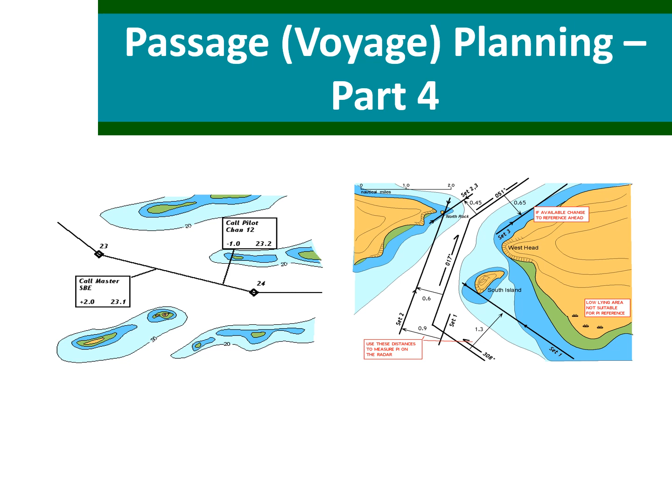Part 4 will focus on the following: we have the concept of the underkeel clearance or UKC, we'll talk about squat, we'll talk about calculation of tidal windows, and also what is the principle of MDR, which is the minimum depth required.

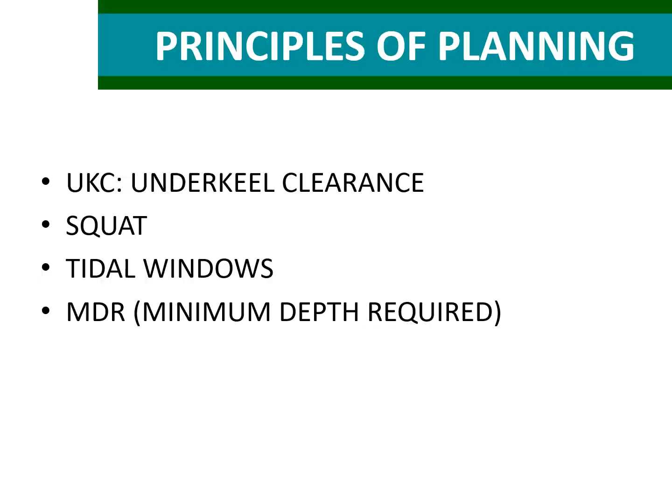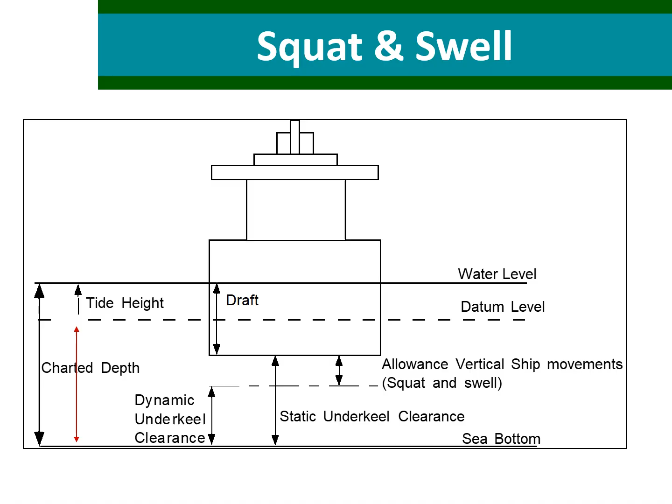So we'll start firstly with the UKC, which stands for the underkeel clearance, as we have known before. As I told you, maneuvering of a vessel is affected when the static UKC is less than 7 times the draft, meaning we are in shallow depth or shallow water. It will become noticeable when it is at 4 times the draft. So when the static UKC is 4 times the draft, it starts to become noticeable, and when it is less than 7 times the draft, that is the indication that the vessel is now in shallow water.

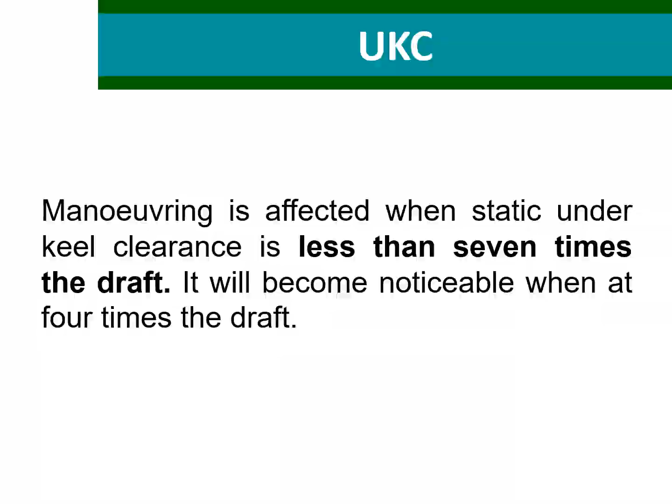And when we say it's in shallow water, the vessel basically starts to experience the principle of squat, because of which the maneuvering of the vessel also starts to get affected, and there's always the danger of the vessel's bottom touching the seabed or the propeller or the rudder getting damaged. So all those things come into play. I'll show you what I mean, and show you some diagrams as well.

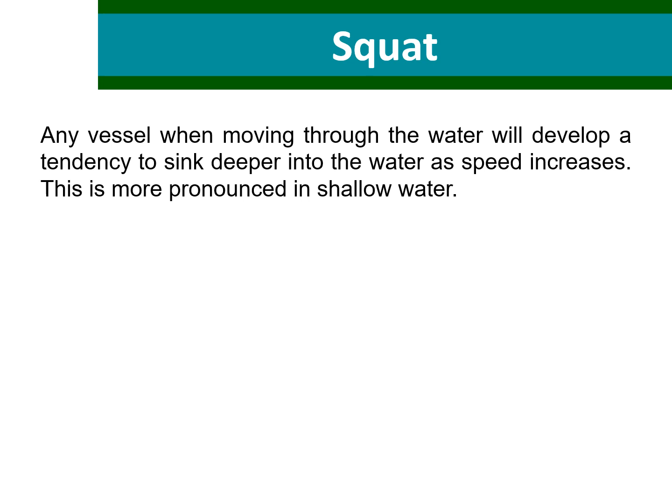Squat is when any vessel, when moving through the water, develops a tendency to sink deeper into the water as speed increases, and this is more pronounced or more noticeable in shallow water. Masters of the ship normally nominate a safe under-keel clearance to be maintained at all times during a voyage.

Now remember, the nomination of the under-keel clearance by the master may vary slightly depending on the situation that your ship is in. Like I mentioned in my previous videos, sometimes in river passages there will be times when you may have to go with as low as 50 centimeters of UKC, which is normally not liked by the masters. But because it's a river passage, sometimes you have sandy bottoms or shallow sandy seabeds made of sand and soft material, where it's even allowed for the ship to touch bottom. So there are different situations, and as a master you will have enough experience to understand in which situation you may allow a much lesser UKC.

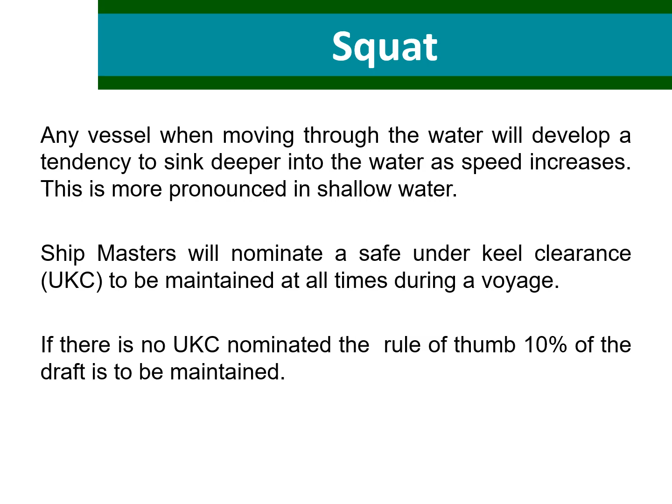But normally the master would like to have a minimum safe UKC, to keep the ship's propeller and the rudder safe and the ship's bottom from touching the seabed as well. If there is no UKC nominated by the master, then the rule of thumb is that at least 10% of the ship's draft should be maintained in depth of water below the keel. So if your draft is 10 meters, then at least 10% of 10 meters is about 1 meter. So 1 meter of UKC, or depth of water, should be available under the keel. That is normally the rule if the master does not nominate a rule himself or herself.

The squat may also be calculated using the formula: squat equals V squared multiplied by block coefficient, CB, divided by the constant number 100. CB, the vessel's block coefficient, can be obtained from the vessel's maneuvering data, maneuvering diagram, or maneuvering booklet, depending on what it's called on your ship. V is of course the vessel's speed through the water in knots, and 100 is a constant.

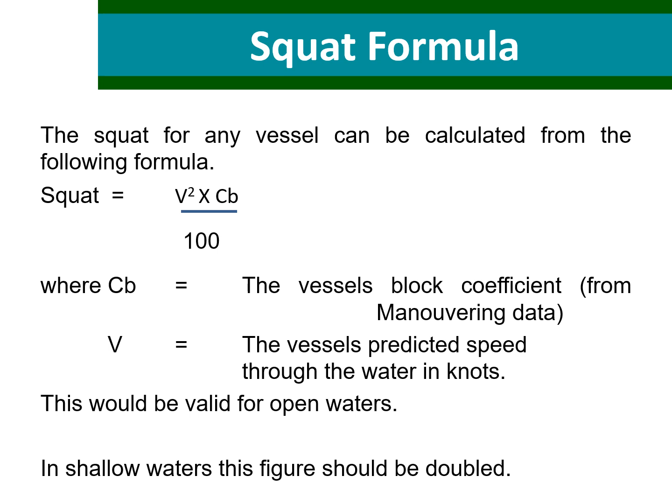This formula is also valid for open waters, and in shallow waters the figure you get is normally doubled, because that gives you a safety margin. In shallow water the danger of squat is more - the danger of the ship running aground or touching the bottom is more profound. So you need to double it, which will give you an adequate safety margin.

The reason for this is that as the vessel moves faster, the water beneath it also starts to move faster. Because of this fast movement of water under the keel, there is something known as the Venturi effect, which is actually a suction effect. As the water moves very fast under the keel, a vacuum is created, and there's a suction effect on the ship's bottom, so the ship sinks towards the seabed. That is squat, if I can explain it simply.

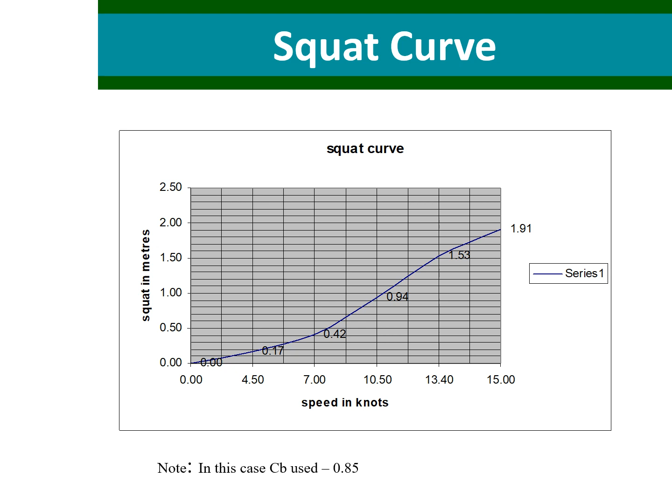That's why as you increase the vessel speed, the vacuum or suction effect on the vessel's bottom also increases, because of which the vessel sinks further towards the seabed.

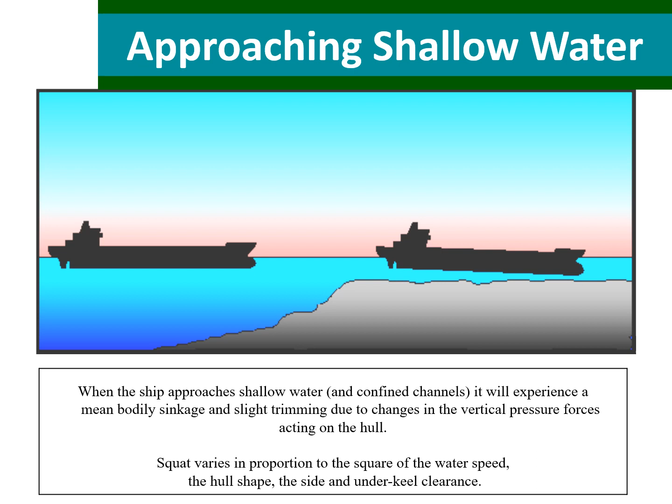The vertical pressure forces acting on the hull is what I was referring to as the Venturi effect, which basically sucks the ship's bottom. There is a suction effect, and that is the vertical force. So squat varies in proportion to the square of the water speed, the hull shape where the block coefficient comes into play, as well as the side and the underkeel clearance.

So you can see here what is happening at zero speed and what is happening when the vessel is moving forward. The full form vessels are shown, and the effect of the static trim on a full form ship's dynamic trimming in shallow water and confined waters is shown.

So if zero static trim, that is even keel, the trim will be by the head due to the full form hull. So which are the full form vessels? Full form vessels are those which have a block coefficient more than 0.70. Otherwise, if it's less than 0.70, they are called fine form vessels.

So you can see in full form vessels, the touchdown will occur at the bow with possible damage to the forepeak tank or the bulbous bow, as you can see in the figure. There are two columns: on the right side we show the vessel moving at forward speed, and on the left side the vessel is at zero speed, basically not moving.

So the vessel is a full form vessel on even keel, but as it starts to move, a full form vessel is likely to trim by the head, and that's why there's more chance of the ship's forward part touching the bottom first, resulting in damage.

If the ship is trimmed by the stern, the trim will be further by the stern when the vessel is moving, underway in flow restricted waters, and touchdown then occurs at the stern with possible damage to the rudder and propeller. So if the vessel is on even keel and moving forward, there's more chance of the ship's forward part getting touched, but with a stern trim, there's more chance of the vessel's stern touching the bottom.

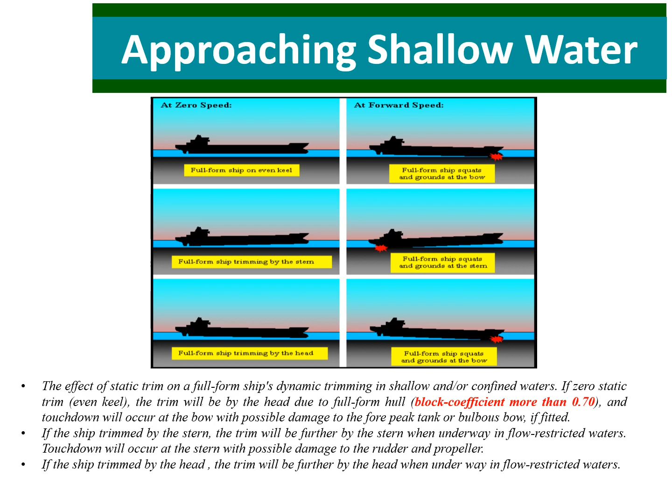Now we move on to tidal windows. In certain tidal areas, adequate underkeel clearance (UKC) may only be attainable when the tide is above a certain height. So you need to wait for the adequate tide for the vessel to have the required UKC to safely sail out from the port.

In such cases, the vessel must transit that area within a certain time period based on the predicted tidal heights. This time period must be clearly shown on the chart and or notes. Predicted tide heights can differ from actual heights, so here you will have a tidal window.

When we say a tidal window, you basically have a few hours window. Let's keep it simple in terms of language - you have that few hours that provide you with a safety margin. That safety margin is known as the tidal window. So you have those few hours within which your ship must sail out.

And to understand what those hours are, you have to carry out a calculation. The chief officer will decide on the departure draft once he or she is aware of the cargo to be carried. Once you know your departure draft, you can carry out a calculation that will tell you when it will be adequate for the vessel to sail out.

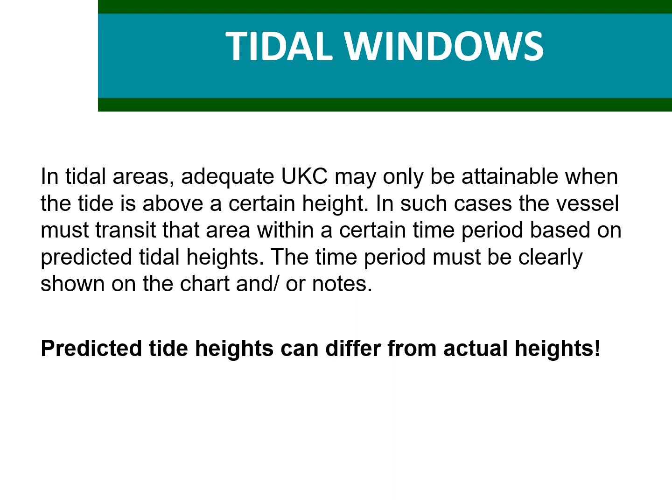This situation is normally faced in river passages or in ports with varying height of tide. Most ports otherwise dredge the channel and keep the depth of the water sufficient for any ship to sail out. But of course you will be going into ports where you may have varying height of tides. For that you have to calculate the time during which you have a high tide, or the adequate underkeel clearance, and when it will be safe for the vessel to actually sail from the port.

For tidal windows, it is frequently necessary when transiting areas of shallow water to analyze the available depth of water, not just on the time and tidal height basis, but also taking into account the vessel's likely time of arrival and departure through the area. In addition, the navigator must take into account the earliest time of arrival and the latest time of departure that the vessel may transit at a particular point.

Because you have to remember that your ships should arrive and depart in time. Your company would like you to arrive and depart in time and not cause unnecessary delays. So you have to make sure that you arrive at the earliest time and you can depart at the earliest time as well, because if you stay in the port and your calculations are not correct, it will cause delays and cost the company extra money.

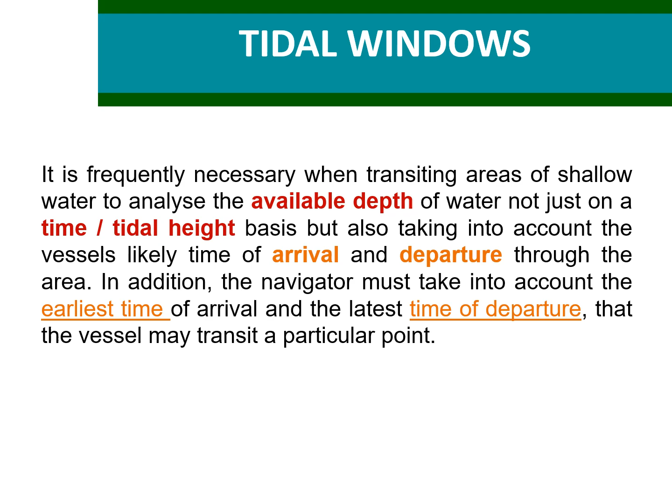And going back to the previous slide, you have to remember that whatever calculation you do, you must add a certain safety margin to it, because your prediction or calculation may slightly differ from the actual situation. So make sure after you calculate, you also have a slight safety margin available to you as a master or officer, so that your ship is safe while arriving and departing the port.

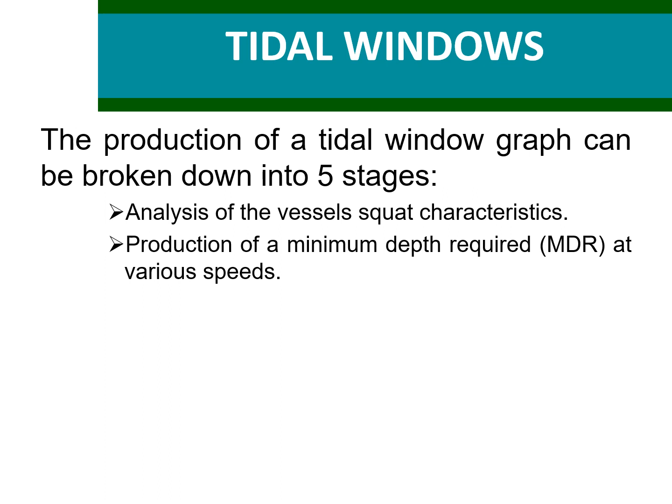The production of a tidal window graph can be broken down into 5 stages. The first stage is the analysis of the vessel's squat characteristics. The second stage is the production of a minimum depth required, or MDR, at various speeds. The third stage is a determination of critical depth points on the chart. The fourth stage is the analysis of tidal heights at the critical points. And finally, the last stage is the production of the tidal graph window.

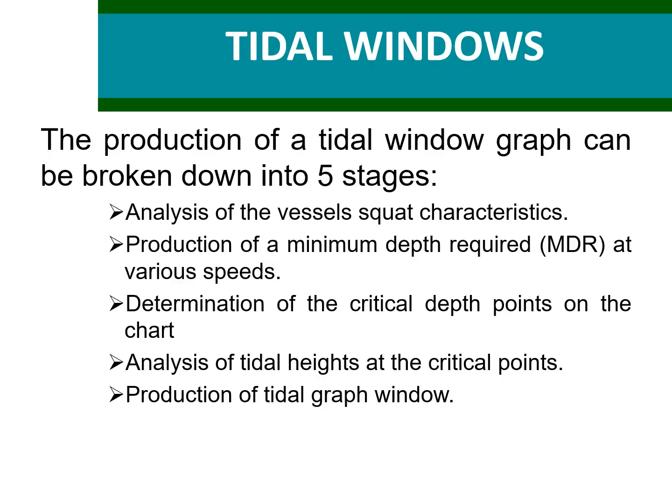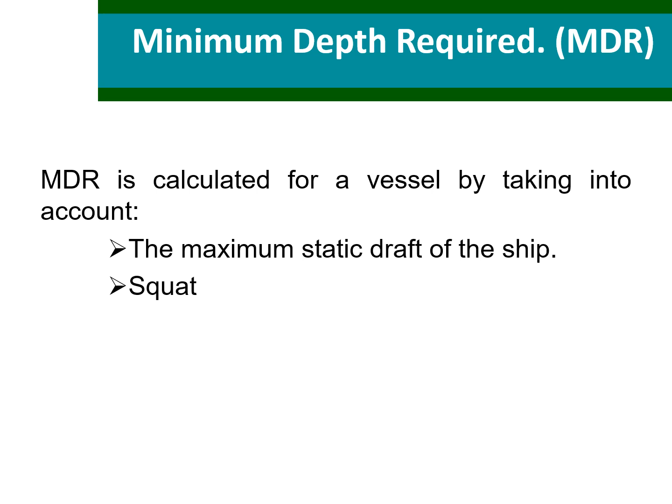The minimum depth required, or MDR, is calculated for a vessel by taking into account the maximum static draft of the ship, the squat, and the required UKC. Remember that the MDR is to be calculated for the maneuvering speed of the vessel, because when the vessel is slowly departing the port, it will not be at its full speed - it will be at its maneuvering speed, and that is the speed that you should be taking into account when calculating the minimum depth required.

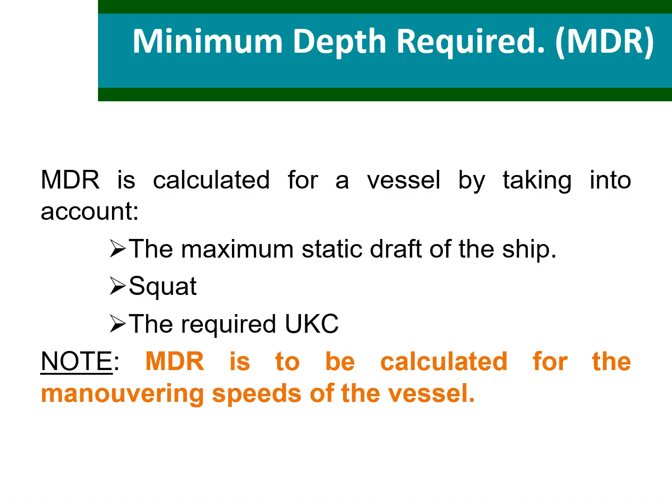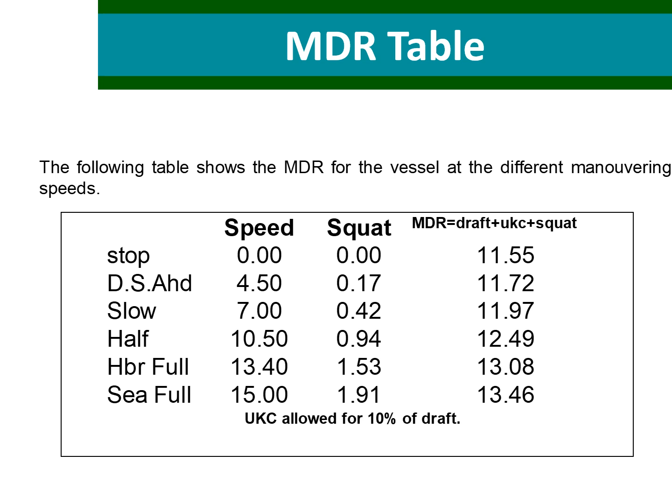UKC here is allowed for 10% of the draft, so your UKC is maintained at least 10% of the draft. As the speed is increasing from stop to dead slow ahead, slow ahead, half ahead, and full speed, you can see the squat value is increasing as well, and so is the minimum depth required, because you're adding the squat value plus 10% UKC plus the draft. So the minimum depth required is increasing, and you have to take these values into account before making any calculations. These are available from your maneuvering diagram as well.

Then we talked about the critical depth. At any point of the entire voyage where the depth of water is less than the minimum depth required, it is considered critical depth, because at that point your vessel is in a critical situation. It requires the height of tide for the vessel to pass over safely, because there will always be chances for the vessel to touch the bottom. You need to have the minimum depth required.

Sometimes you take into account the safety margin - that is where the safety margin comes into play. But as soon as the depth is less than the minimum depth required, you have to say the vessel is in a critical situation at that point of time.

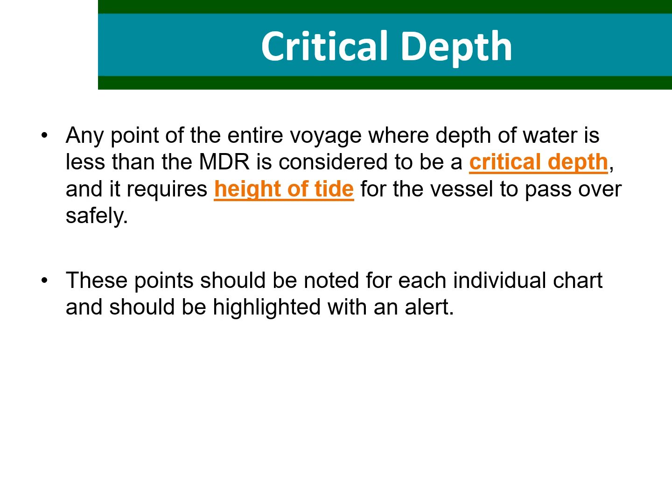These points should be noted for each individual chart and highlighted with an alert on the chart itself, so that the officer on watch can make a note of these points before arrival and warn the pilot or master of these points during the passage of the vessel.

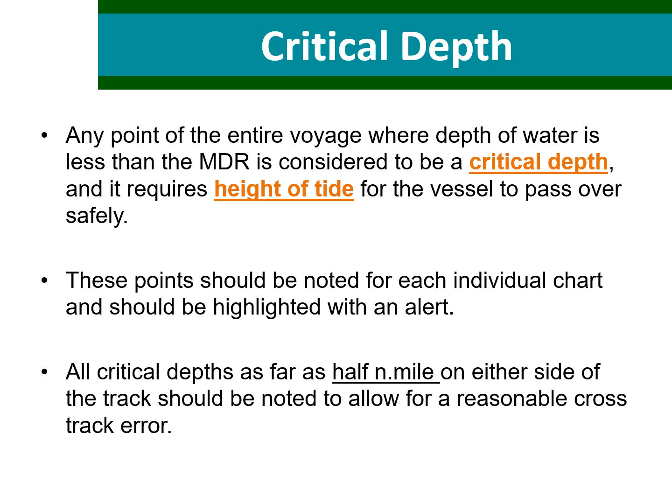All critical depths as far as half a nautical mile on either side of the track should be noted, to allow for a reasonable cross-track error, because it will be hard to keep your vessel exactly on the decided track. So you must allow for some movement, and that's why half a nautical mile on either side should be marked, because the vessel will not be exactly on track all the time. Current, wind, maybe altering to avoid collisions, and other factors may come into play during the passage. There could be fishing boats, so you have to allow for that margin of movement, and that's why you should mark it on either side of the track.

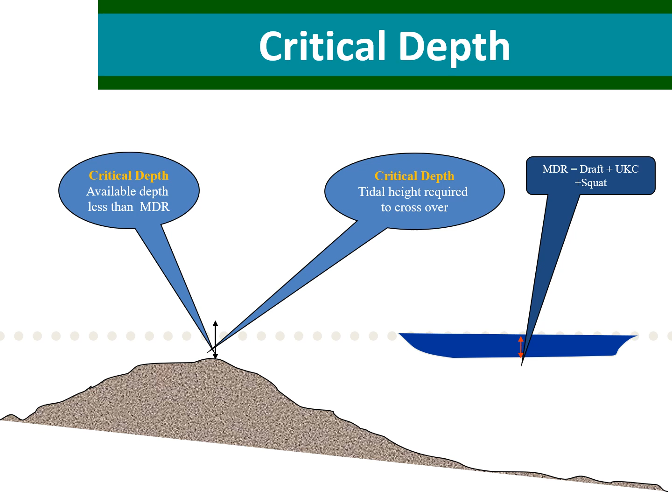So the critical depth is when the available depth is less than the minimum depth required, and tidal height is required to cross over. We've talked about all this, I won't waste time again, but this is where I was trying to show you if the vessel is going to pass over a danger of navigation. This becomes critical - the black arrow shows the critical depth, but the circular dots horizontally show the critical depth which is less than the minimum depth required, and that becomes the critical point. Although the vessel may pass safely over the wreck or danger to navigation at this point, it is still a critical situation when the vessel's passage should be monitored carefully by the master and the officer.

Then we come to tidal heights, which can be obtained from various tide tables, and in offshore places can be found from co-tidal charts. I have made numerous videos on tidal calculations, and I've given you the links to those videos in the description section below. Please watch those videos on how to calculate tides for standard ports, secondary ports using simple harmonic motion, simple interpolation, and so on.

Make sure you note that the predicted tidal heights may vary due to unusual meteorological conditions. You cannot say for sure that whatever calculation you carry out based on the books is what you will experience - sometimes they may be slightly different. That is why I always say you must keep a margin of safety to ensure your vessel is safe throughout the passage, even if the depth fluctuates a little bit here and there.

Once the navigator has calculated the minimum depth required for the vessel and has found the depth of water at the critical point on the chart, it is then a matter of applying the predicted height of tide for that location and finding out the tidal window.

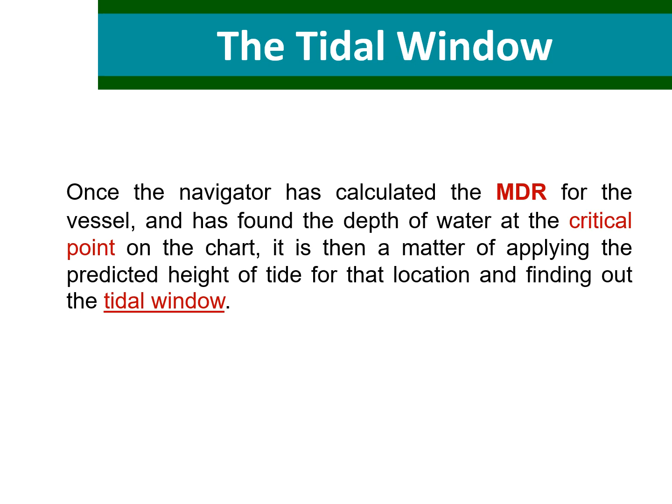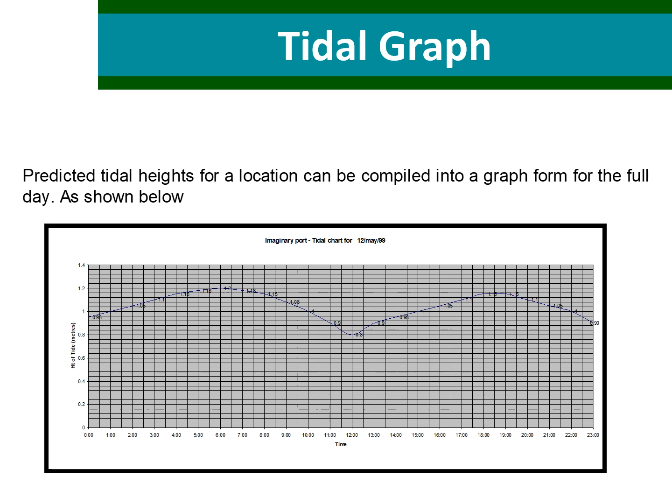This will give your master, or you as an officer on watch, or if you are the master, an idea of when it is safe for the vessel to sail out with the required height of tide or with the minimum depth of water required, and that gives you the margin. So depending on what height of tide you want to sail out with, or rather what minimum depth required, the hours between those times will give you the tidal window.

So here, of course, the draft of the vessel is 11 meters, and if I consider 10% of the draft to be maintained as UKC, my UKC required will be 1.1 meters. So 10% of 11 meters is 1.1 meters.

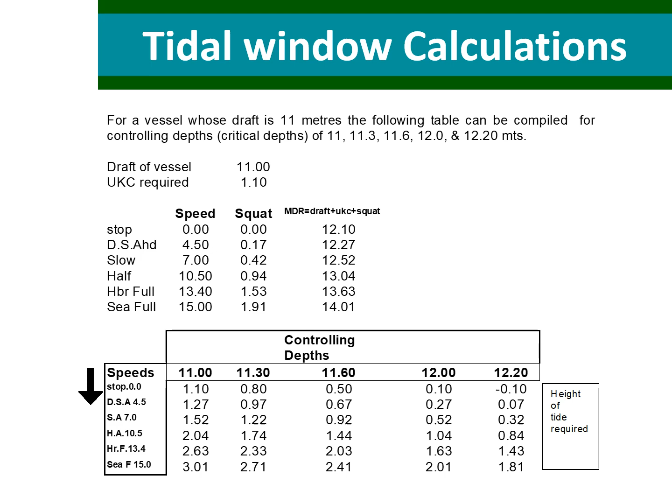So once on the graph, it will be seen that for a particular controlling depth, there is a fixed time during the 24-hour period that the vessel will have sufficient water to cross the depth. For a depth of 11 meters, the vessel will not have sufficient water to cross over at any time of the day, even at dead slow speed, because the squat will change with speed.

In which case the vessel must either reduce the draft, which it can do by deballasting operations, or take a different route. Whereas for a controlling depth of 11.3 meters and at dead slow speed, the height of tide required will be 0.97 meters.

So you may have to make some adjustments where the chief officer will come into play. He might pump out some water from the ballast, because that would be the only way. Other than that, I don't think you can get rid of any cargo, or you may adjust the cargo on some ships to get the draft required. But in most cases you will be engaging in deballasting operations, if it is allowed to do so, and you will have to reduce the draft.

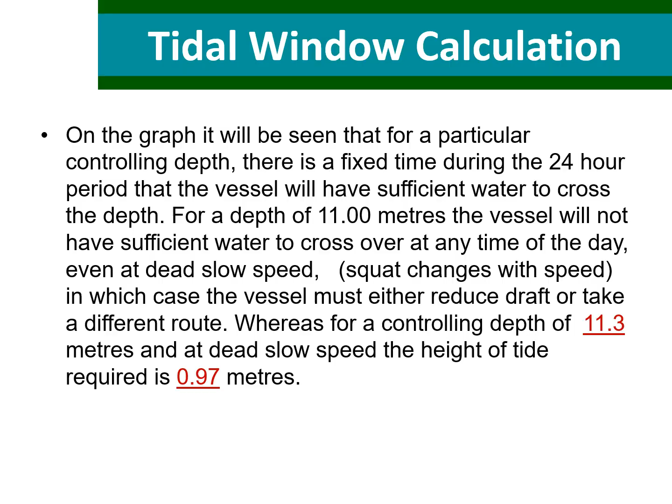Otherwise, another experienced master may reduce the minimum depth required - maybe he doesn't want 1.1 meters, maybe they are happy with 70 centimeters or 50 centimeters. In some situations you have to sail out with lesser under keel clearance, but that depends on the situation, whether the seabed is safe, whether that is routine. Those decisions will be taken by the master in consultation with the port authority and the pilot. So these are different situations, but here I just wanted to show you an example of what is done normally if you want to keep 10% of the draft as the UKC.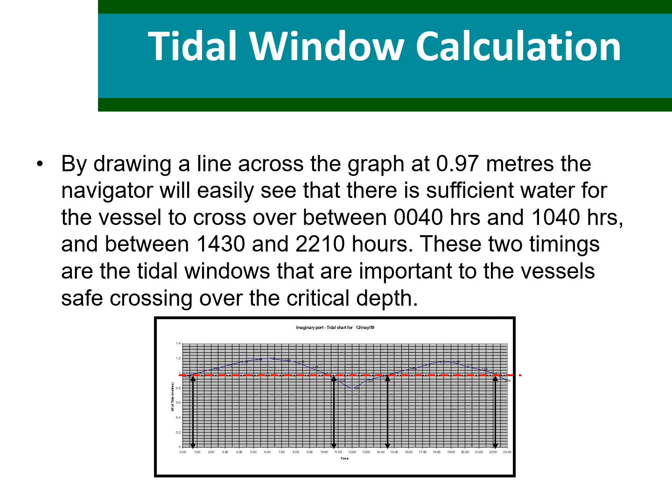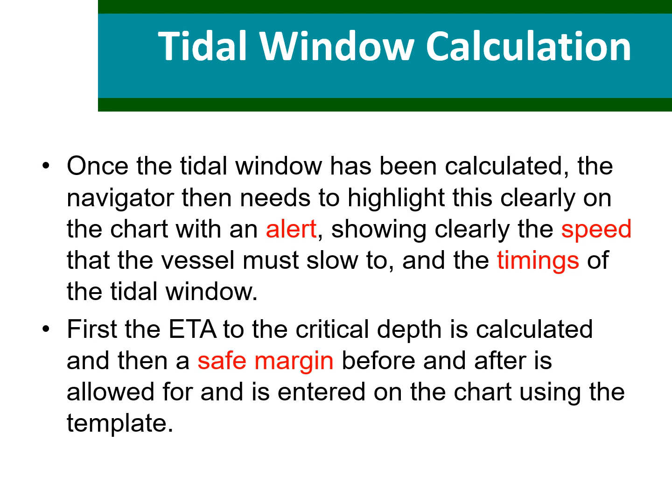So once the tidal window has been calculated, the navigator then needs to highlight this clearly on the chart with an alert showing clearly the speed that the vessel must slow to and the timings of the tidal window. First, the ETA, or the estimated time of arrival to the critical depth, is calculated, and then a safe margin before and after is allowed for and entered on the chart using the template that I will show you.

So this is the template that I have shown you. You can see that we calculate the 0 Hr, which refers to the estimated time of arrival or estimated time of departure, and the time -1 and +1 tells you about the tidal conditions - 1 hour before arrival and 1 hour after arrival, or 1 hour before departure and 1 hour after departure. So 0 Hr refers to the exact time, -1 is 1 hour before, and +1 is 1 hour later. That gives you some safety margin or tidal window as well.

Not tidal window, but it gives you information about 1 hour before what is happening with the tide and what will happen 1 hour later, because the vessel may not exactly arrive or depart at the time that has been decided - it may arrive or depart a bit earlier or later. But at least you have the information available on the chart in way of this template, where the time is provided, and so is the depth plus tide, and the UKC that the vessel will experience during that time is provided as well. So the master or the officer on watch can make an informed decision on whether it is safe for the vessel to arrive or depart during that time.

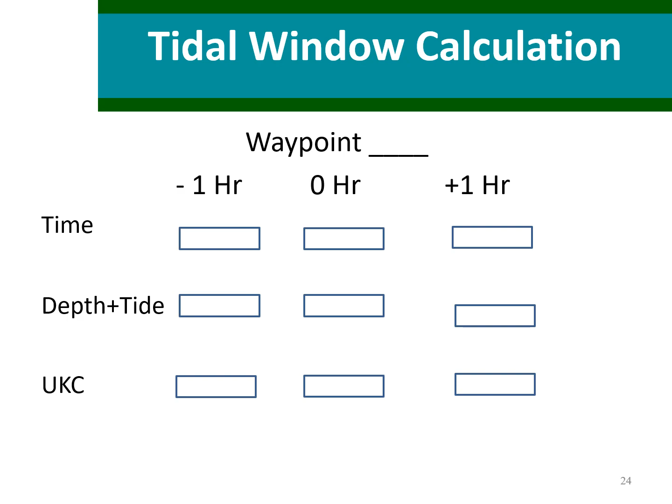Finally, a spreadsheet may also be created by the officer on watch, which will show the draft of the vessel, the minimum depth of the water, the tide height required, and the UKC available at any particular time. So here also the tidal window may be noted and highlighted, so that it is easier for the master to make a decision on when it is safe for the vessel to proceed with the minimum depth required.

So I think you've got the idea. These are just examples to show you how the alert may be generated and how the alert may be shown on the charts and your passage plan. You may use some other template - it depends on your company and the software that you are using as well.